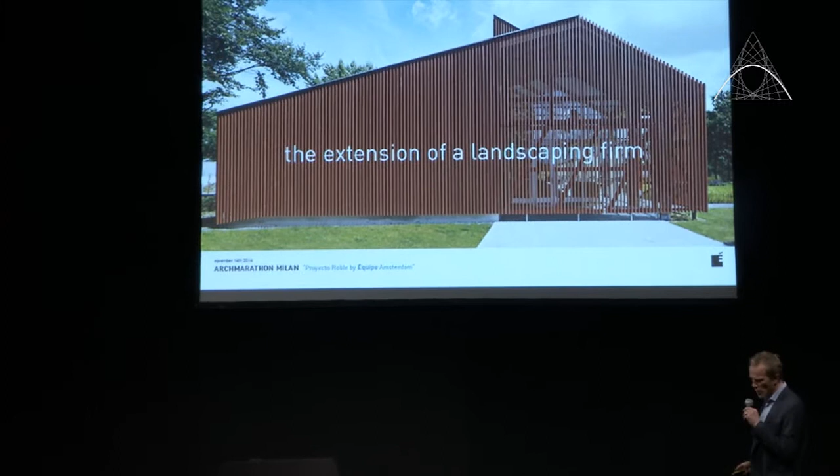Now the nice thing about Proyecto Roble is that all these skills are present in this building. And of course we have to meet the client as well, because it's not an ordinary office, for instance, for upper class business people. This is an office for a landscaping firm.

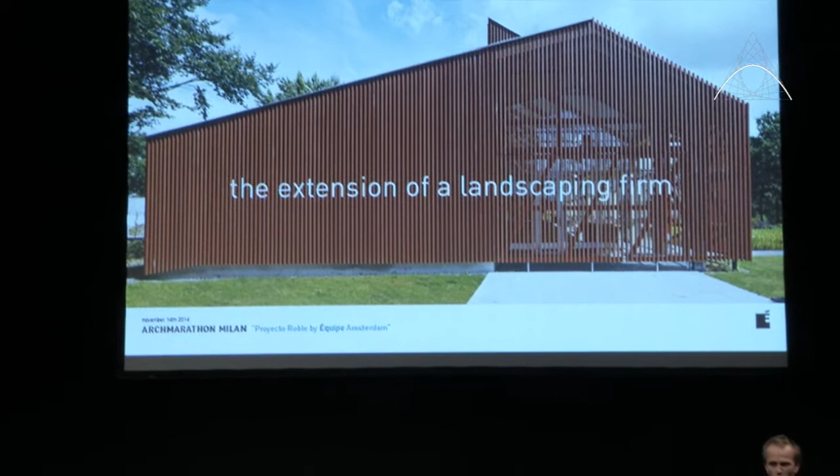These are people that are working with nature, landscapers and gardeners every day. They're literally standing with their feet in the soil every day. So even long before the word sustainability became a hype, they already had great care for the environment.

One other great good of this project is the fact that we were given a lot of time from the client in order to investigate and research a lot of different possibilities together with him and together with the contractors. And he was telling us the story of the oak.

That's why it's called Proyecto Roble. His father told him this a long time ago - his father is the founder of the company - and he was always referring to the oak when talking about a good project or a good company, because it should grow slowly and steady to become a very strong and wise tree.

Now, in his turn, the client is telling the same story to his nieces who live in Barcelona, so that's why the Spanish connection comes in. He's referring to the project of the oak, Proyecto Roble, to them as well.

And it's not given to have a lot of time in many projects. So the question was, how do we make this the ideal workspace for our employees over here? Well, first of all, it should be an inspiring place.

You want to inspire the employees, but also the clients and other visitors that come there. It has to be a healthy building, comfortable. But even better, we wanted a place to educate people, to educate the next generation of gardeners.

Or even better, have cross-pollination between interdisciplinary sections. So it shouldn't only be a flagship for this company itself. It would be even better if we succeeded in making a key project on sustainable building and environmental design.

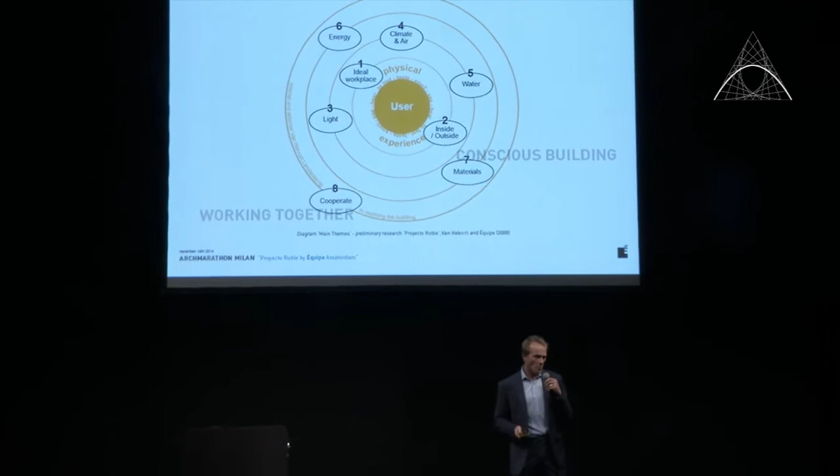When we're looking at the different themes in the building design, there are themes that are closer to the experience of the user, but also other themes that seem more far away from the user. They have a great impact when you make your decisions as a technician or as a designer. Even the way we cooperate together in realizing a building greatly influences the experience.

Now, conscious building - in the picture here you see, for example, cross-laminated wood construction connected with as minimal steel as possible. The way of looking at the structure is to minimize the amount of material you use, to be able to demount it after several years, and to get it back into a biological or even technical cycle. That's really the way to look at all decisions you make on every material.

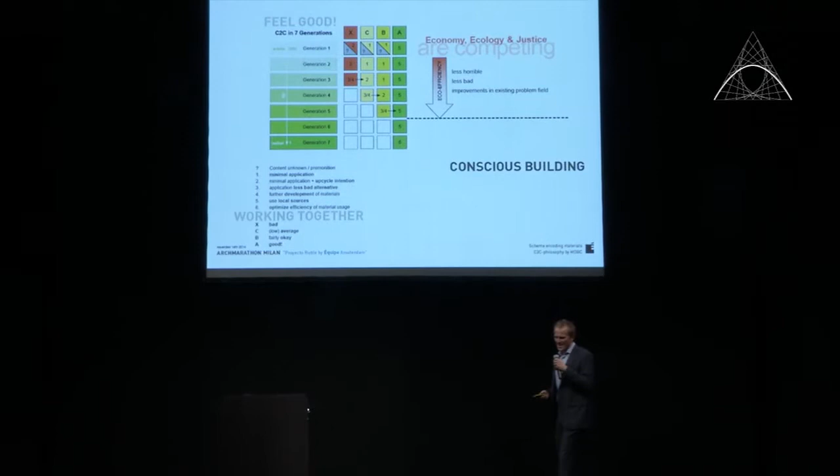So, of course, you hear my affection for the cradle-to-cradle philosophy, and I'm really a big fan, but I'm also realistic, and you should understand that we are only in the first or second step of becoming the ultimate cradle-to-cradle society or world.

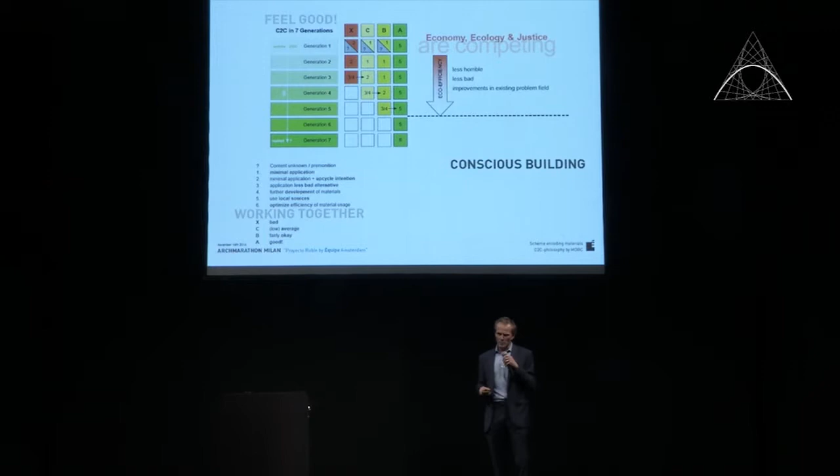So instead of leaning back and relaxing, just looking at what other people are doing and making choices for slightly less bad materials, slightly more efficient processes, we think as designers, together with the contractors, you should try to give an impulse to innovation. You should try to think outside the box and look for new solutions in order to make that next step towards the ultimate cradle-to-cradle society. That really was a focus for us during the whole engineering process.

That also means you should use another way of working together. In a traditional tender, as I know it in the Netherlands, we work with the main contractor. He forms sort of a shield between you - the design team and the client - and the subcontractors. But the knowledge is with the subcontractors, and we want to use this knowledge. The worst thing in this case is that they don't even communicate with themselves. So we want to put them at one table and not call them subcontractors, but co-makers.

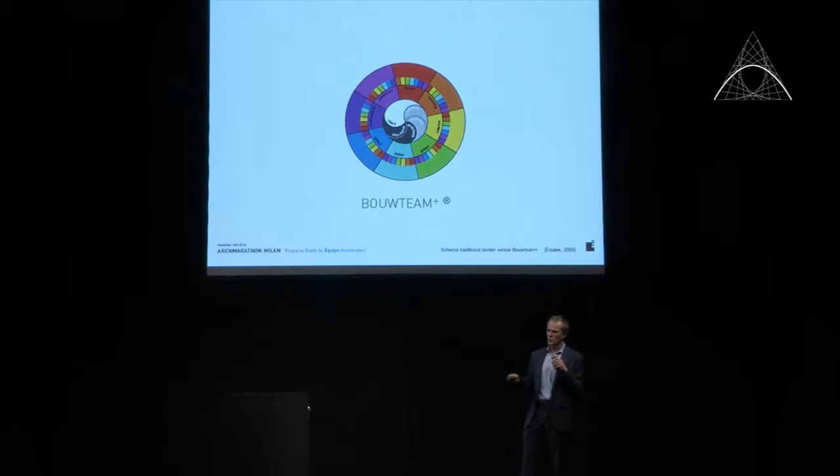And we want to give them inside information of everybody's business in order to learn and get to a better integrated process and design. We also want to give them the opportunity to get feedback from all the advisors we normally use in a design process, in order to make better choices in the engineering of the building and get to the end contract before realizing it.

This also means they should be able to get rid of the strong demarcations between the different disciplines. So this could mean you get a little bit less or a little bit more of the piece of the pie in the end, in order to get a better building.

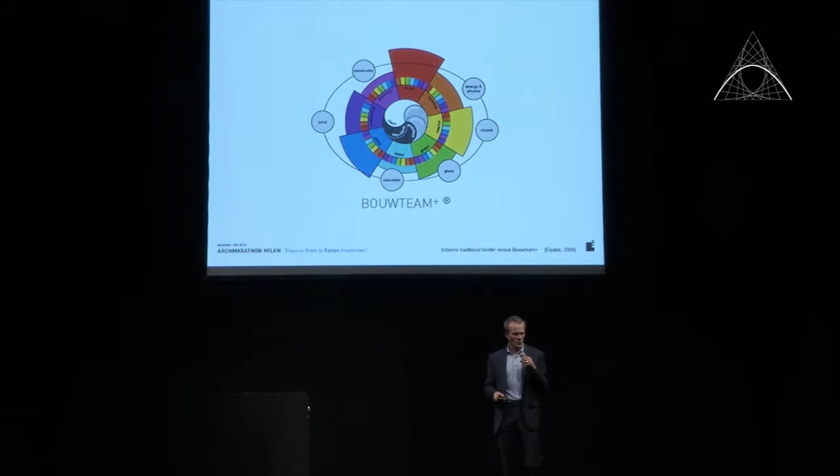So instead of a big barrier between the design discipline and the contractors, we are looking for a shared responsibility in the end. And the gain for them is not only financial, but also gaining knowledge and giving them a platform for possible innovation, which is a great good, especially in times of crisis like now.

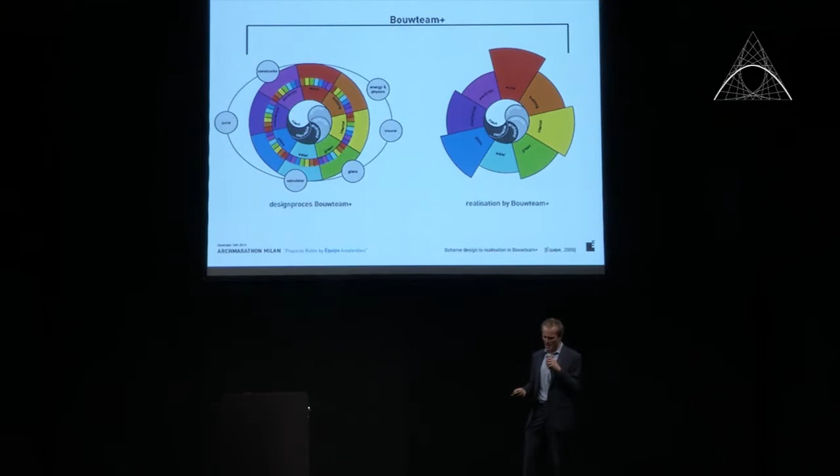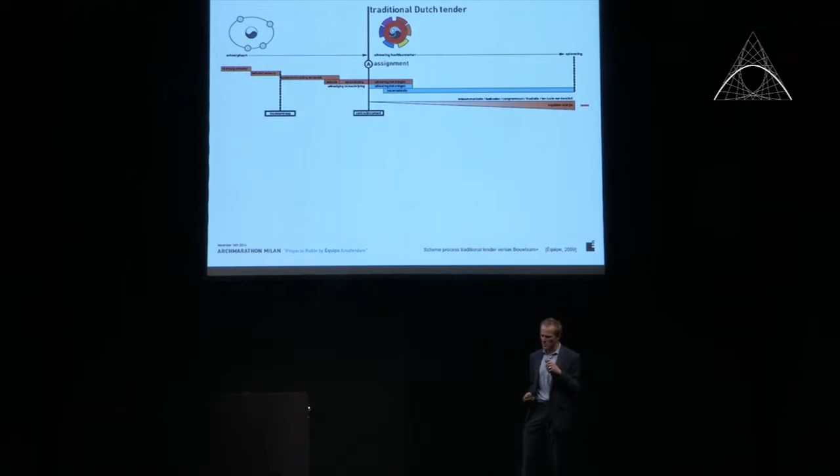So instead of making them think after the signature is put under a contract, and every discussion gives a lot of negative energy on the building side, you want to pull all the discussions in front, so that you know from each other, when the signature goes under the contract, what we are going to build. And we get a positive flow of energy on the building side. And this is so important.

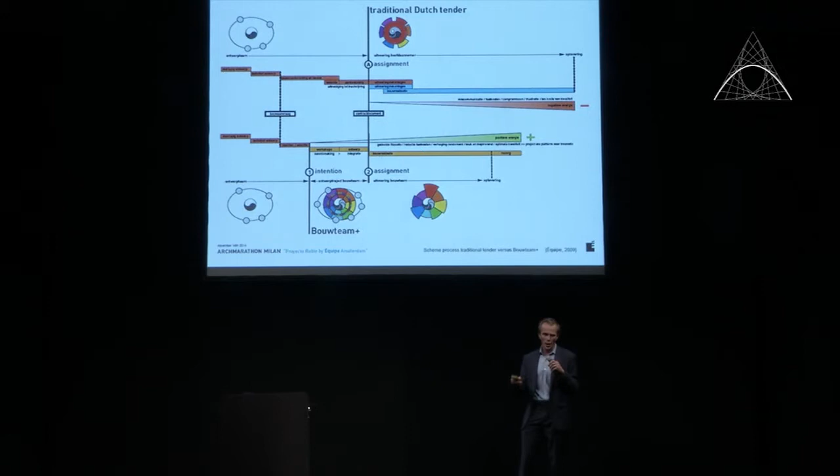You cannot really quantify it, but how the hell should we make a feel-good building if we don't have a feel-good process together? It's so important to work with people who are dedicated to the job and bring love to the building site. That's the way we like to work with the craftsmanship in the contractors.

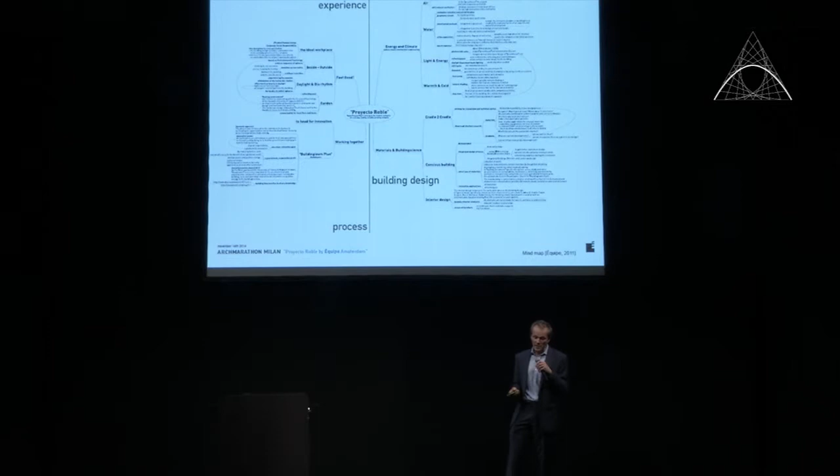So together we broke all the themes down into more technical themes in terms of design issues. We looked at all the different possibilities and documented them to make it possible to make the best choice together.

Also, you have to be aware of the context. This is more or less the physical context in the rural south of the Netherlands, an historical, valuable agrarian context. It's triangled in between a highway, a railway, and an entranceway to a very big industrial area in the city of Tilburg, and that's the only area where you really see the building.

So we wanted to give it a sort of a sign, a billboard effect over there. And you have to be aware of the social and traditional context of the family firm, which was founded in 1964 by Walter and his wife Annie van Helvoort.

And it means that during 50 years there are a lot of traditions and a way of them looking at the world. We want to make all the choices with this knowledge in our head.

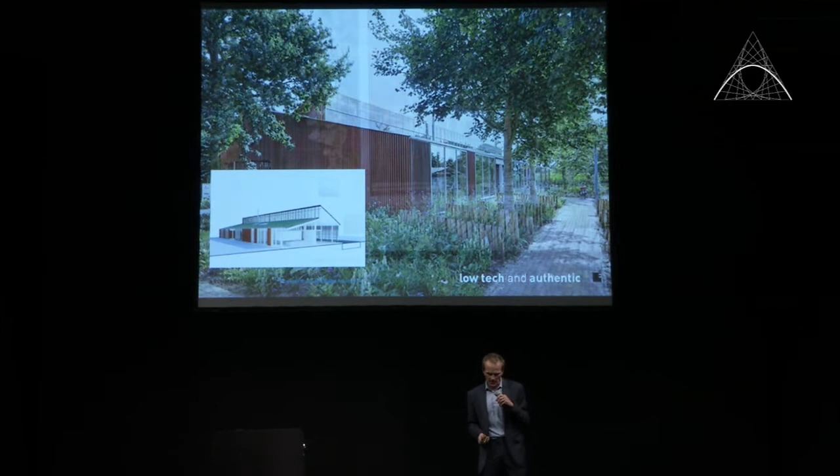So obviously it looks like an agrarian building, and it's quite a simple section, but very clever at the same time. With the high sun in summer, there's a small cantilever to prevent the warmth from getting in, and we use natural shading in the form of hop plants that grow very fast.

We have about 300 square meters of photovoltaic cells on the roof, and when you look closely at the roof, you see it's not mounted on top. We got rid of a big bunch of the construction, and made the PV cells the cladding itself. So there too we were looking for a smart way to bring the different disciplines together.

Now, the lower sun in winter is not prevented from getting in, so it can warm the building. We have a reflecting pool to reflect the light as far as possible into the building. We wanted to use a lot of daylight and as little as possible artificial light.

To do so, we've chosen to make a lot of glass on the northern facade. Now every calculation tool in sustainable design tells you not to make a lot of glass on the northern facade, but here too, make your own choices.

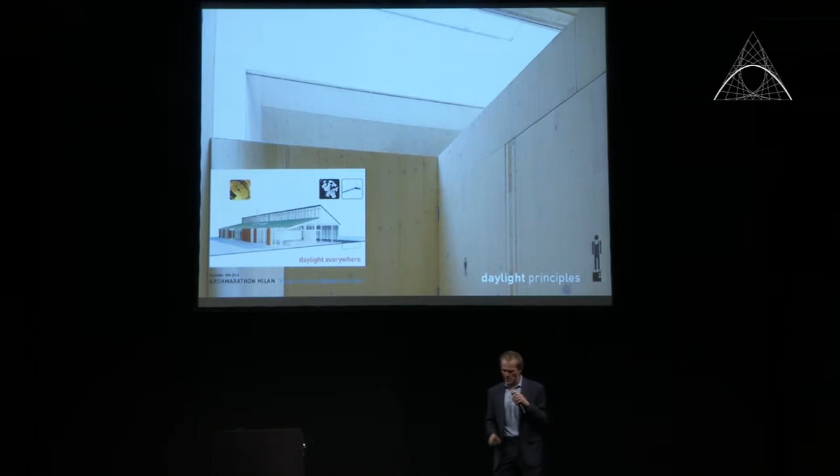If you want to work with a lot of daylight, just make this choice and balance it in the rest of your design. So there are a lot of skylights as well, even in the toilets. There's a shed roof, and you see the reflection of the water in the ceiling as well.

What's nice to point out is that the lights are indicated on daylight, so they only go on when it's very dark, when it's getting dark. And the armature is made from raw aluminium, so it's not finished.

This makes it possible, in 50 or 80 years, when you want to reuse it, to do so without having any pollution in the material itself.

The only preconditioned air we use is in the offices, mostly in winter, and then only when it's activated by a CO2-guided system.

And the ventilation is natural, and also the roof shape helps to get the natural ventilation started.

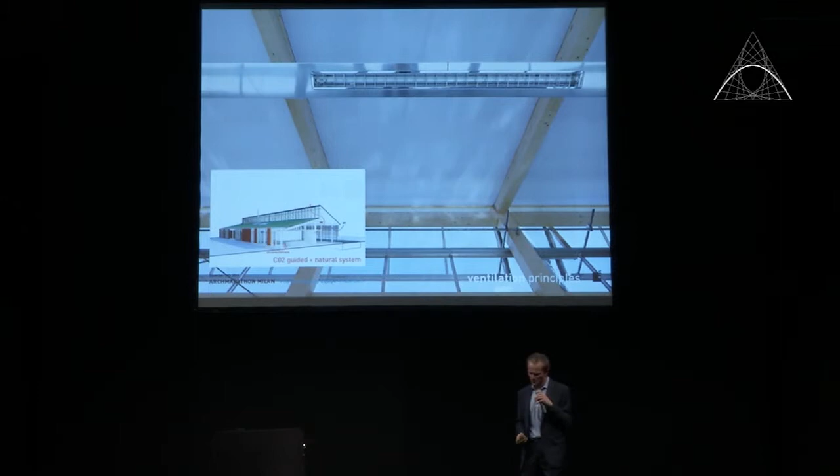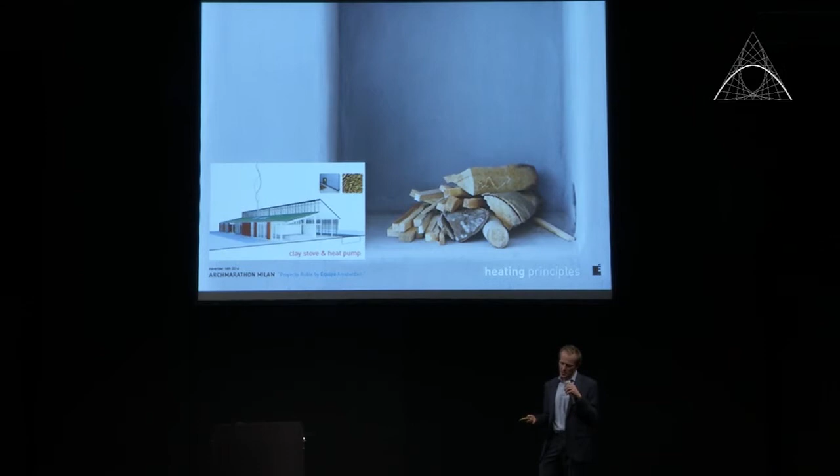We introduced a clay oven to burn the waste, the trimming waste that people brought back from their own business. This also meant we could make a far smaller heat pump. So in the end, it was cheaper with a clay stove than without.

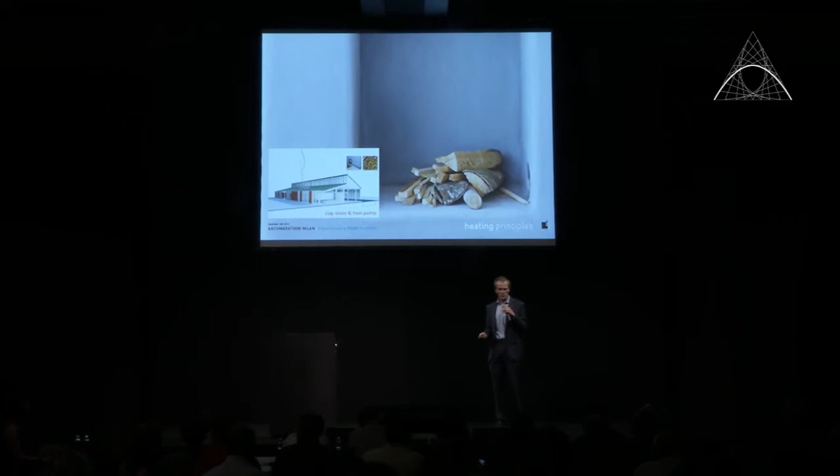It's also a social element because it's at the heart of the building. Of course it's warm, and this is the place where everybody gathers.

Then we come to the green roof, and using or retaining the water on your own ground. We also projected, in the preliminary design, a constructed wetland on the ground floor in the reflecting pool. Well, this was a huge investment, two different investments.

So when we talked about it in the building team, the water guy said, well, if I can get rid of the urine, I can make a far smaller constructed wetland to minimize the amount of money involved. Then the gardener told him, well, if we separate the urine, I can use it, because when you crystallize the urine you get struvite, a very worthy component in fertilizer for the ground, so we can use it in our own business.

And then we're back in the history of Tilburg again, which is a textile industry city, where employees early in the morning brought a pitcher full of pee from all the family in order to bleach the wool that was used and made in the textile industry.

So still the nickname of the people in the city of Tilburg is the pee in the pitchers, and so we're really using the urine of the employees right now.

Back to the green roof again. We had a far smaller constructed wetland, and we saw the volume of the constructed wetland is almost the same as what we're using in the green roof. The only difference is the proportion, because the constructed wetland is approximately 1.2 meters high, while the green roof is only 8 centimeters high, but much larger in surface.

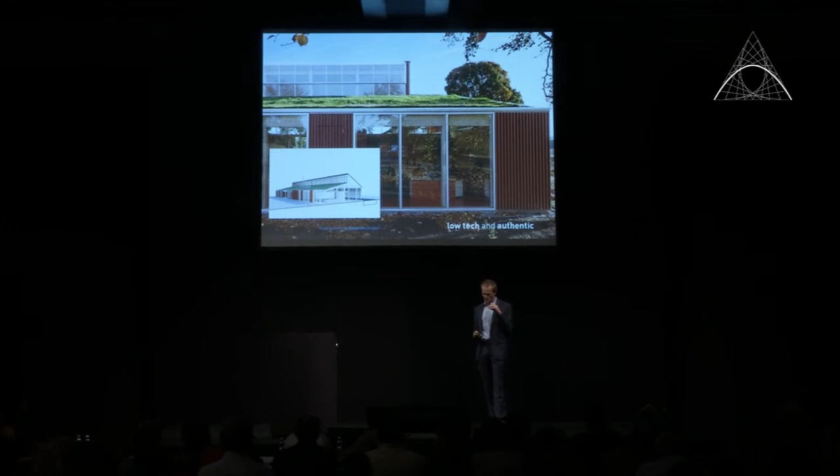So they made some mock-ups and a lot of research, and in the end they made the very first constructed wetland on a sloped roof in only 8 centimeters of substrate, which is a real innovation. You could use it in a very condensed urban situation as well.

The same philosophy is used in the interior design, where everything is bespoke and tailor-made. For instance, everything looks like wood, but in fact there's also a board made of compressed material from agricultural waste. When you look at the building, it was an existing building.

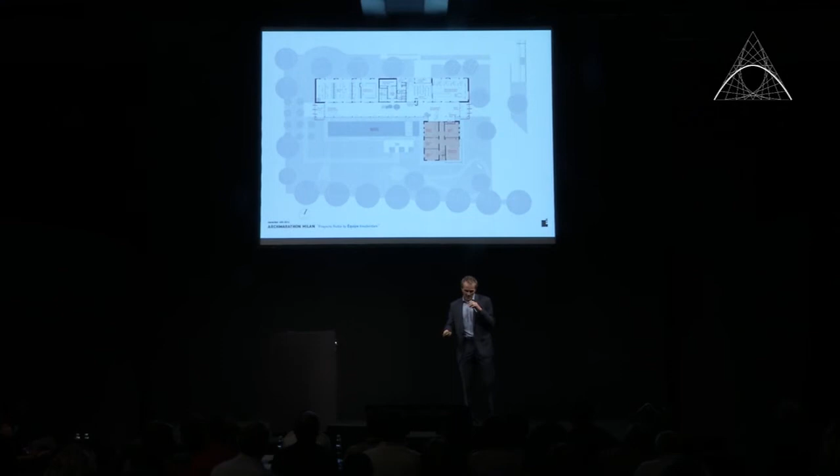This is the greenhouse, which is mainly a very large hallway. When you enter the building, there's a very smooth transition between inside and outside. There are elements in the greenhouse to separate the front, which is very busy, from a quiet back.

There's a second entrance for the employees that work outside and come in with dirty boots. They have their own facilities as well, with light from above, here in the shower, that's functioning as a lantern in between two sanitary rooms.

At 1, there is the reception, 2 is the clay stove you already saw, and 3 is the planter, where you see clay plasterwork and the cradle-to-cradle tile. And the wood you see is the only wood that came from overseas, from the Greenpeace Good Wood Guide.

This is old rubber wood from old rubber trees. When they don't deliver any rubber anymore, they used to burn down the trees, but now we use it for furniture. All the rest of the wood is from Europe.

And in the back, 4 is the sample table you already saw on the former photograph. This is the size in the middle of the canteen in daily life, but we can expand up to 80 people, making a multifunctional hallway.

This is one of the most important office spaces where the project leaders work. At 5, there's the desk, where there's a lot of communication in the morning and late in the afternoon between the indoor staff and the outdoor personnel.

For a more quiet conversation, they can go to a smaller meeting table behind the story cabinet. The story cabinet is made from scrap material and rest material of the building process, so we didn't buy any new ones. It was designed rather late in the process, making it able to tie up all the loose ends, like the flat screen, the mailbox, or a key box. And you can always tell the story about why to pick different materials on different occasions.